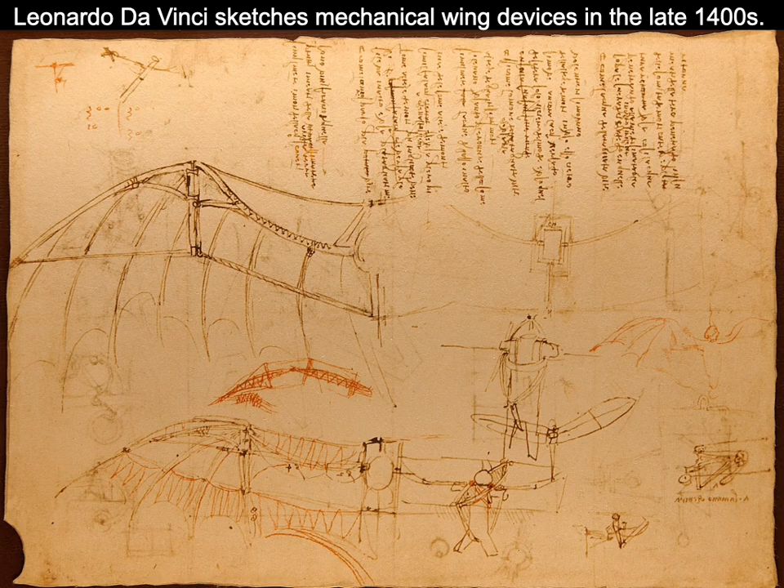In the late 1400s, Leonardo da Vinci became fascinated with flight and sketched a number of mechanical wing devices. Like many others before him and after him, he drew his inspiration from the birds. Unfortunately, his design would never have gotten off the ground. Humans are just too heavy and don't have the muscle power to achieve flight by flapping wings.

The first real breakthrough came from the Montgolfier brothers, but their approach was entirely different. The brothers owned a paper manufacturing company. After noticing that a paper bag would rise up into the air when held over a fire, they decided to test this principle using a much larger bag with a fire suspended below it. A sheep, a duck, and a rooster became the first lucky passengers. Fortunately, they landed safely, and a few months later, Étienne Montgolfier made the first manned balloon flight.

On December 1, 1783, Professor Jacques Charles and the Robert brothers made a successful flight from Paris in a hydrogen-filled balloon. Hydrogen, being the lightest element, rises just like hot air. To descend, the pilots opened a release valve to let some of the gas escape, then tossed out bags of sand to slow the descent if they were coming down too fast. This method of controlling altitude was cumbersome, and there was still no way to control the direction of flight.

Henri Giffard attempted to solve this problem by giving a more streamlined shape to the balloon and mounting a steam engine and propeller in the carriage. This made some rudimentary directional control possible, but only in very light winds.

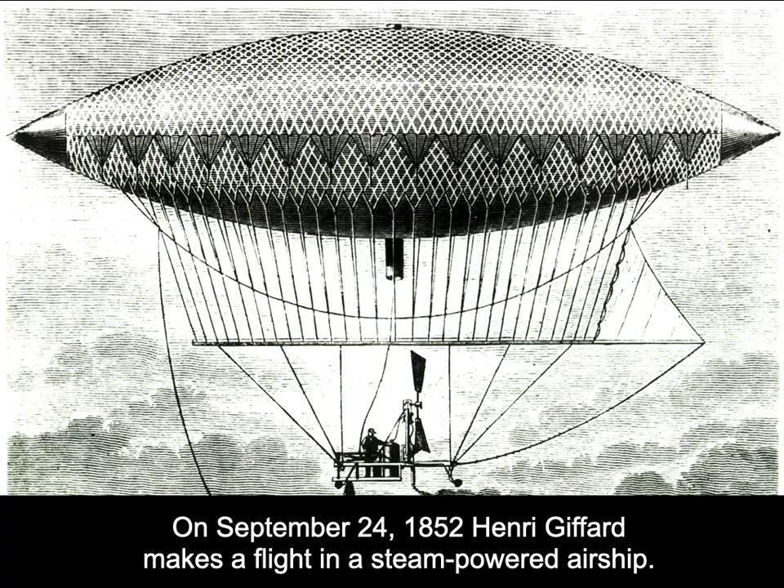Meanwhile, others were trying to solve the problem of heavier-than-air flight. Otto Lilienthal made a number of flights in gliders from a hill on the outskirts of Berlin. He was able to control his direction of flight by shifting his weight forward and aft, and from side to side. Unfortunately, he was killed after hitting a gust of wind and stalling the glider.

The Wright brothers diligently studied the writings of Otto Lilienthal and began building and testing their own gliders. In addition to making extensive observations of birds in flight, they also built a wind tunnel in their bicycle shop to better understand the principles of lift and aerodynamic control.

The last piece of the puzzle was to develop a lightweight engine, which their mechanic, Charlie Taylor, was able to build for them. Everything finally came together on December 17, 1903, and the Wright brothers were able to make the first successful powered flight. The amazing short film in the next slide has actual interviews with people who knew and worked with the Wright brothers, including their mechanic, Charlie Taylor.

What the Wrights had achieved at Kitty Hawk barely evoked passing attention in a nation whose people were absorbed with the problems of a dynamic new age. There were other less celestial wonders closer at hand: the automobile, the telephone, the motion picture.

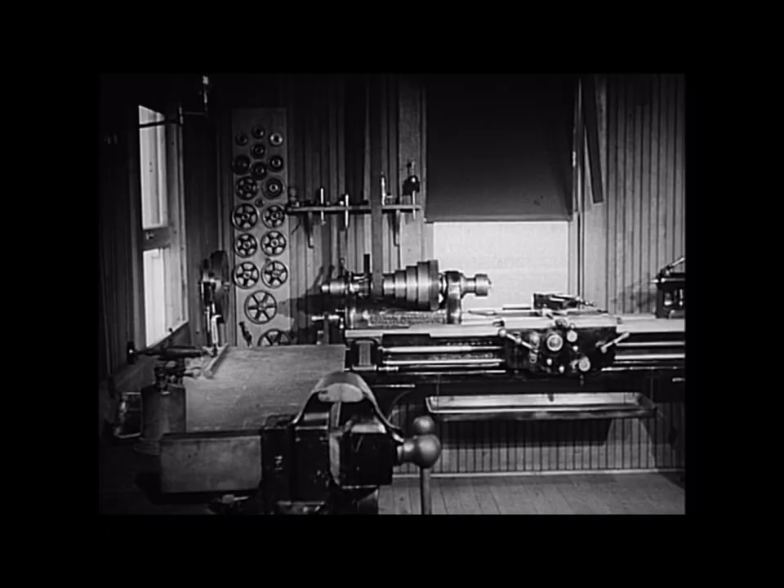The telegram from Kitty Hawk had a special significance for the mechanic who worked in the Wrights' bicycle shop, Charlie Taylor. 'Of course, I was greatly pleased to know it had been accomplished, but at that time it didn't seem to be anything wonderful at that. I started on repairing bicycles back in the 80s.'

And then I later went to Dayton and built bicycles for the Stoddard Manufacturing Company. They were just starting up in the bicycle business. Then I got acquainted with the Wrights, and I built bicycles for them. I did all the repair work while they went down to Kitty Hawk to try out their gliders.

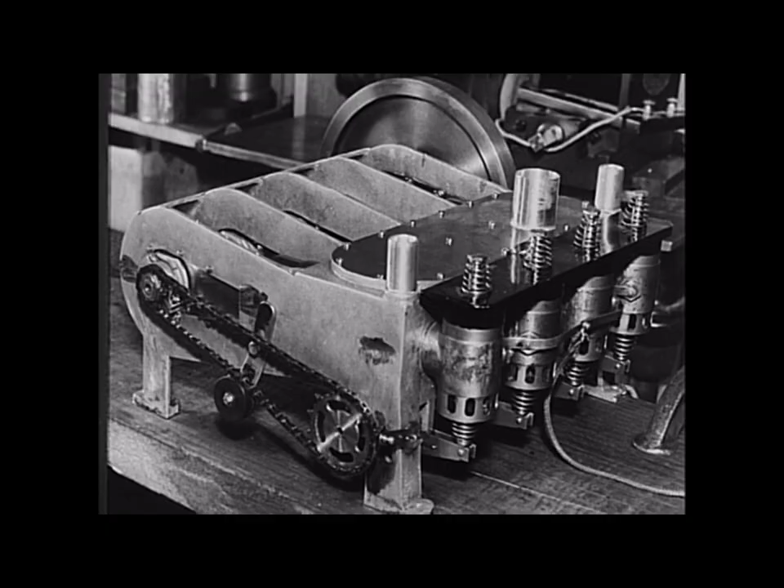Well, all they needed was power to keep on flying. So when we designed the motor, I made all the different parts in the motor. I even made the crankshaft, out of a solid block of steel, about 32 inches long, 6 inches wide, and 1 5/8 thick. I cut it right out of the solid block by drilling holes and knocking out large pieces, then turning it up in the lathe. The motor itself, from the time I started till I had it ready for test, was 6 weeks.

50 years ago, I can remember it as though it was yesterday almost.

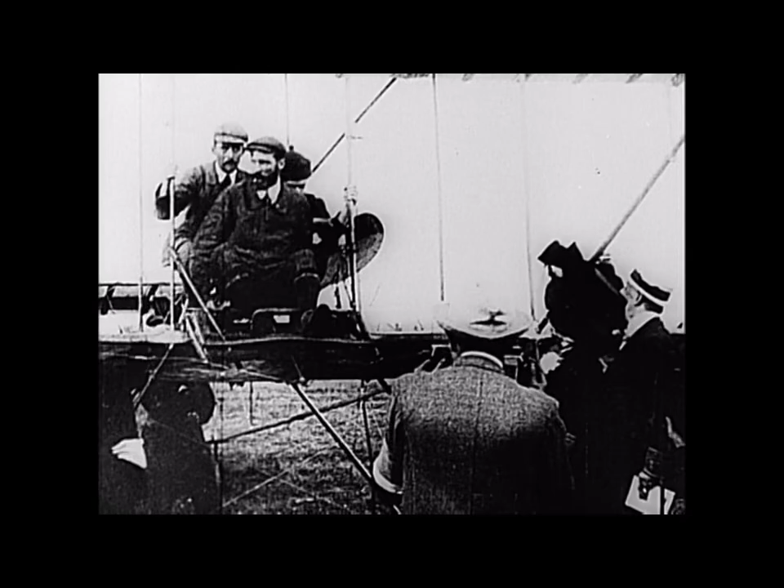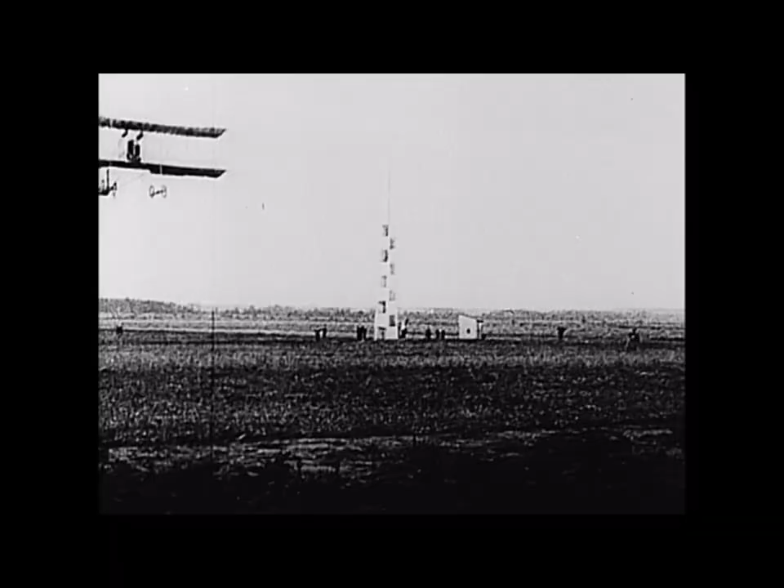The Wrights had offered to demonstrate their airplane to the United States Army shortly after their first successful flights. The Army declined, preferring to develop its small fleet of balloons as an air arm. Oddly, it was a young balloonist lieutenant of the Army, Frank P. Lahm, who finally was instrumental in obtaining a chance for the Wrights and their airplane. After 4 long years of failing to recognize the Wrights, finally, in December of 1907, the Board of Ordnance and Fortification granted an interview to Wilbur.

At once, he inspired their confidence. This led to a contract in February of 1908 between the Wright brothers and the Signal Corps, in which they agreed to furnish an airplane that would fly 40 miles an hour, carry 2 persons, remain in the air for 1 hour, and, strange to relate, was to have some kind of device by which, in case the motor stopped, it could be landed without crashing.

In the summer of 1908, Orville Wright brought to Fort Myer, Virginia, the airplane that was to fulfill the specifications of the contract. Day after day, we watched him fly around and around the field in his tuning-up flights. And finally, on the 9th of September, he broke the world record by staying in the air for over 1 hour.

On landing, he came to me and said, 'Would you like to go up?' You can guess my answer. I made my first flight in an airplane that day with Orville Wright, 6 minutes and 40 seconds. Lieutenant Lahm became the first military officer ever to fly in an airplane.

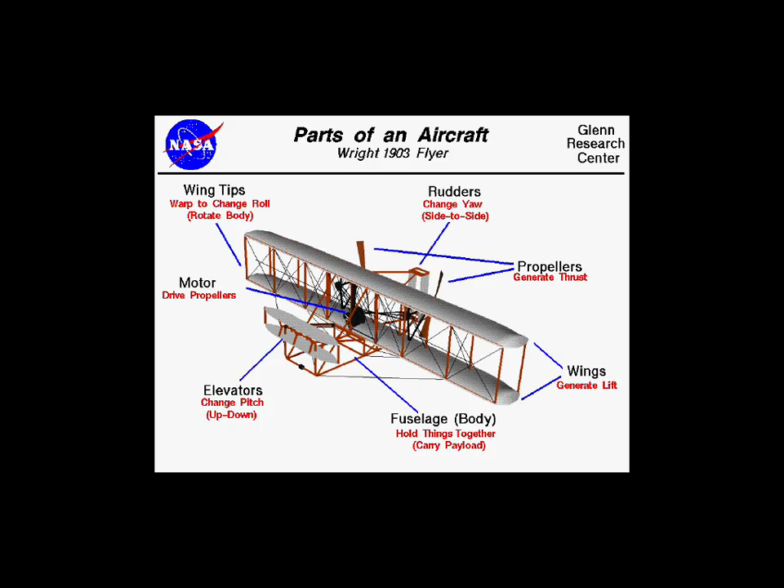This form of aerodynamic control, referred to as 3-axis control, was much more precise than the weight shift control utilized by Otto Lilienthal in his gliders. The aircraft could be rotated along 3 axes. The elevator, located out in front, could be deflected up or down, causing the pitch to move up or down along the lateral axis. Deflecting the rudder left or right caused the front of the aircraft to yaw left or right around the vertical axis. The right and left wingtips could be deflected in opposite directions, causing the aircraft to roll left or right along the longitudinal axis.

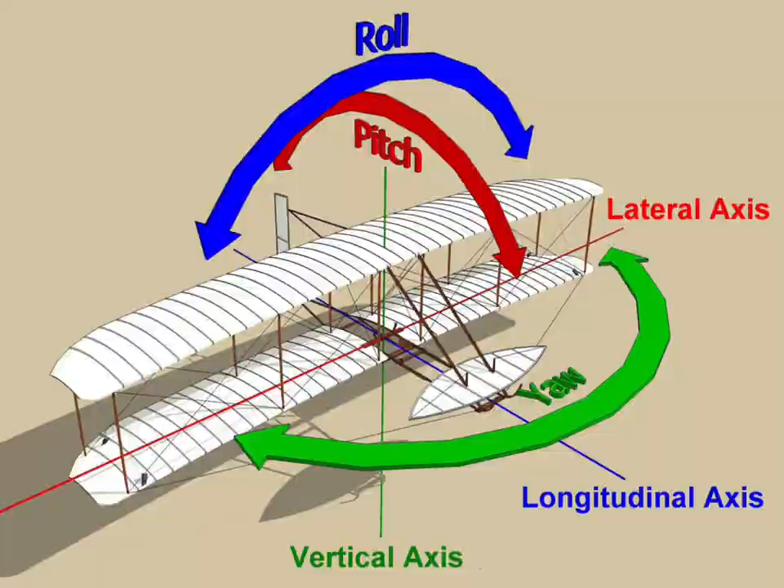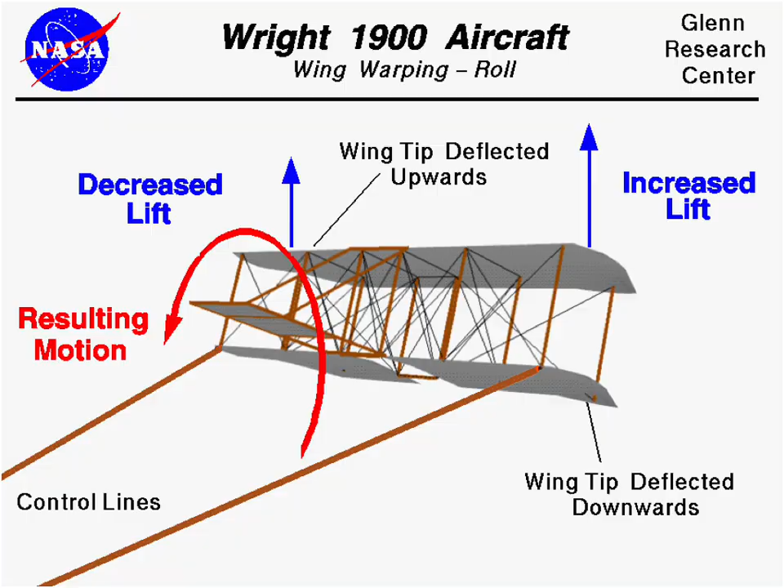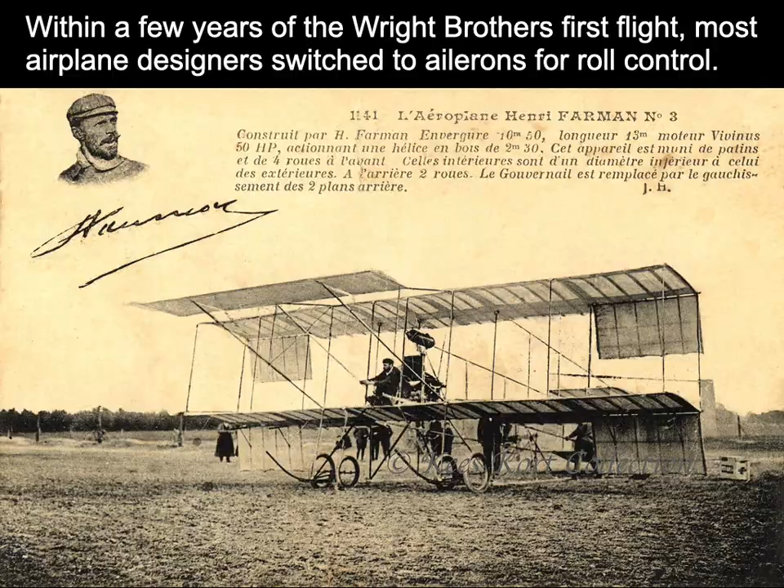The Wright brothers' system of wing warping, which they had patented, was soon abandoned by subsequent inventors who favored ailerons. These consisted of panels fitted to the wing's trailing edges that could be moved in opposite directions. Ailerons worked just like wing warping, spoiling lift on one side while increasing camber and generating more lift on the other side. All modern aircraft use ailerons for roll control.

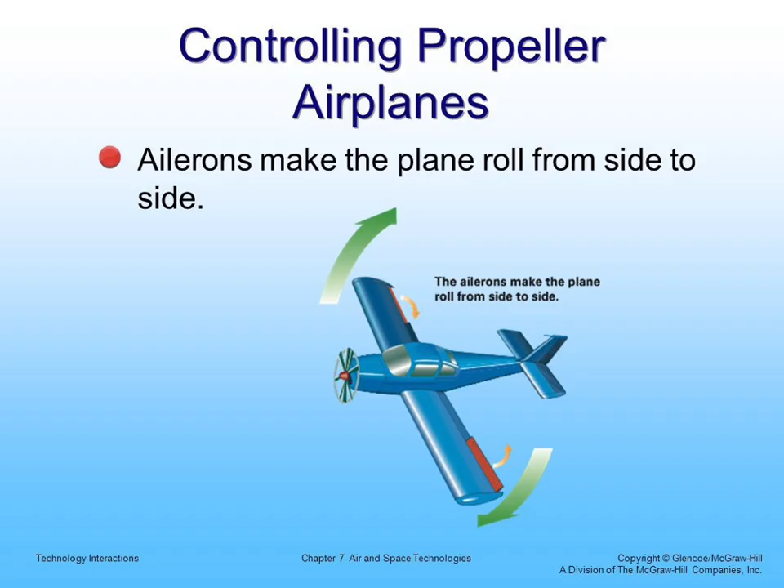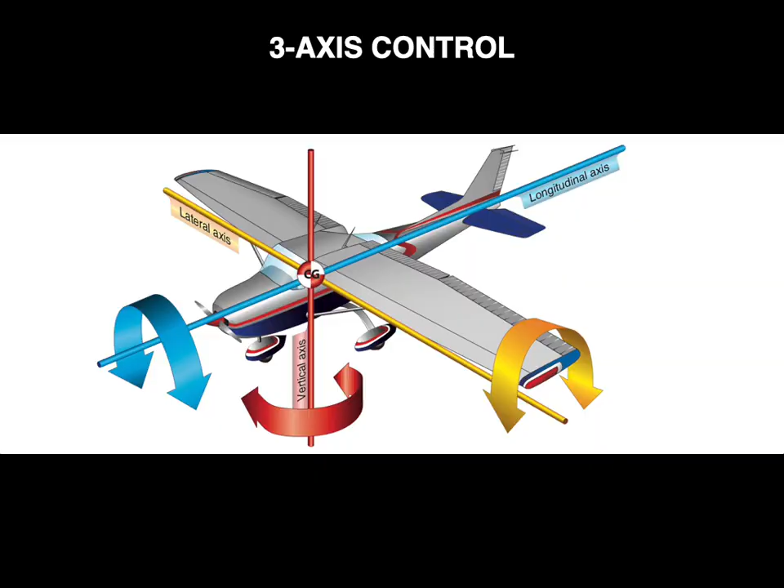The ailerons, elevator and rudder are connected by cables and pulleys or pushrods to a stick or yoke manipulated by the pilot, allowing for full 3-axis control. These control surfaces are called the primary flight controls.

In addition, most training aircraft also have secondary flight controls. A manual trim wheel or electric trim button, connected to a small deflecting surface on the elevator, can be adjusted from inside the cockpit to relieve the pilot from putting constant pressure on the stick or yoke. Rudder trim can be achieved by bending a small metal tab on the trailing edge of the rudder, but this should only be done by a licensed mechanic.

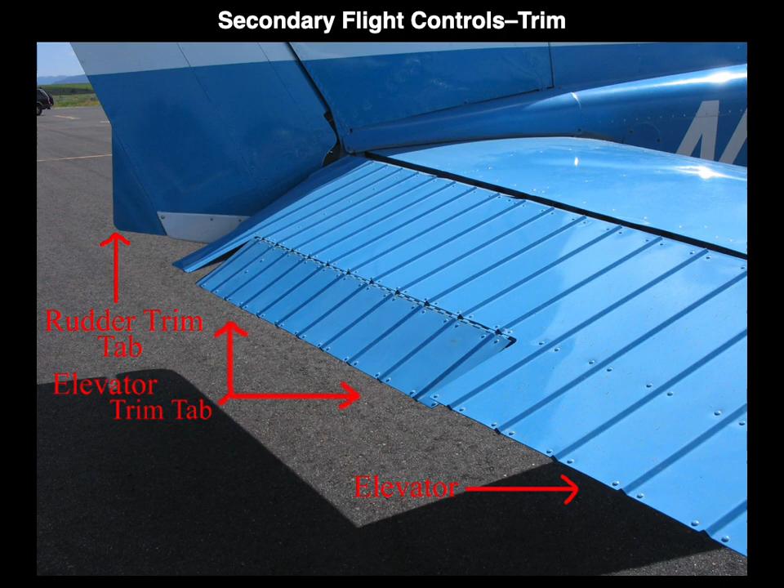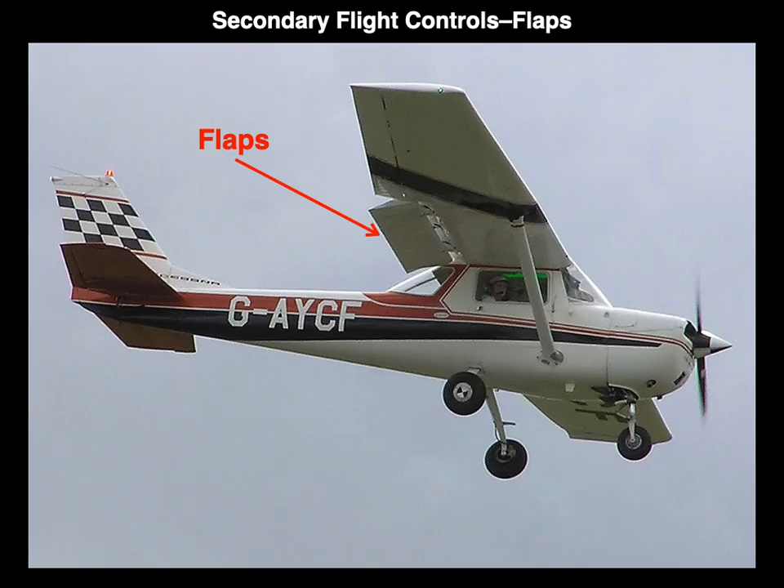Flaps are another type of secondary flight control. They consist of a panel on the trailing edge of the wing that can be deflected downwards, simultaneously increasing lift and drag. Deploying the flaps allows the aircraft to make a steeper approach to landing, without increasing airspeed.

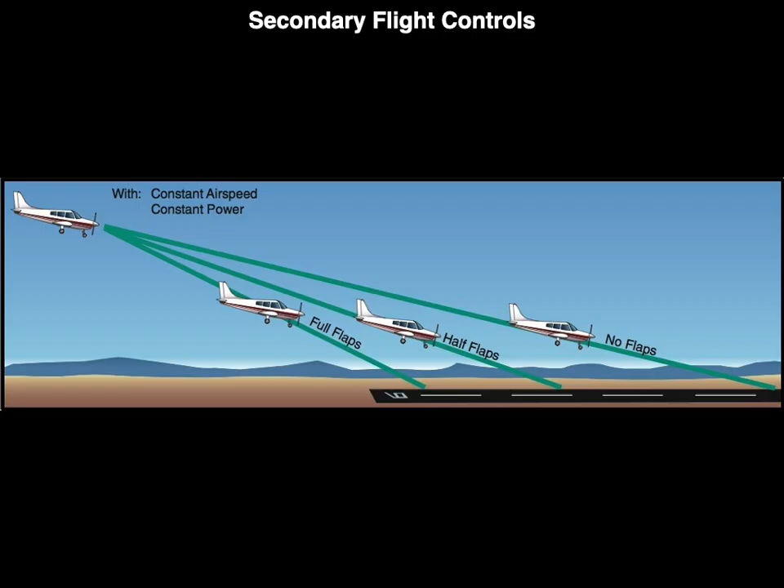Large airliners have many other secondary flight controls, such as spoilers, that can be deflected upwards into the airflow over the wing to reduce lift and aid in the descent. Spoilers are also used on gliders, but not on powered training aircraft.

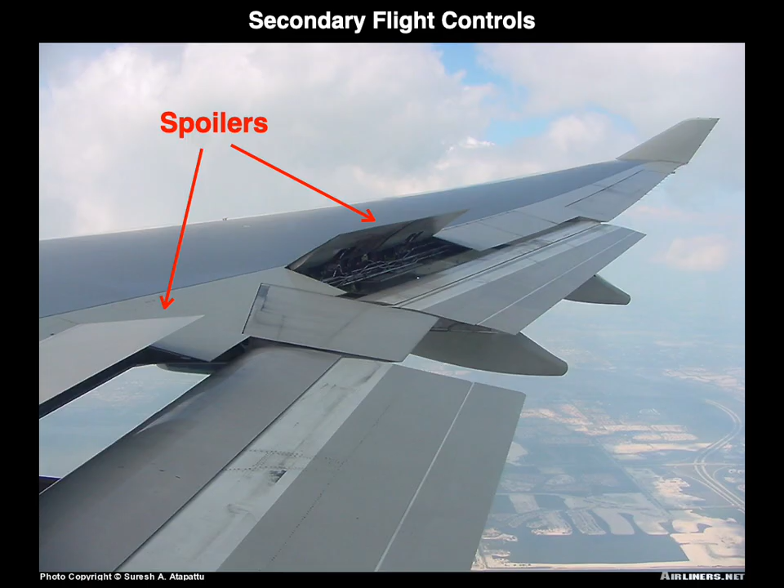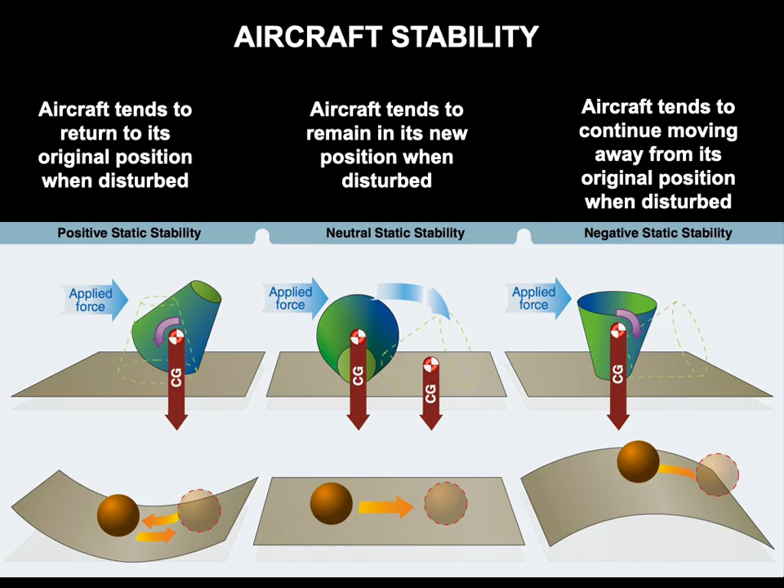Stability is critical for flight control, especially on aircraft that will be used for training. Stability can be positive, neutral, or negative. There are two kinds of stability that are important in aircraft design: static and dynamic.

Aircraft designed with positive static stability will return to the previous flight attitude after a pitch-down disturbance. Those with neutral static stability will remain in the new flight attitude, and those with negative static stability will continue further and further away from the previous flight attitude.

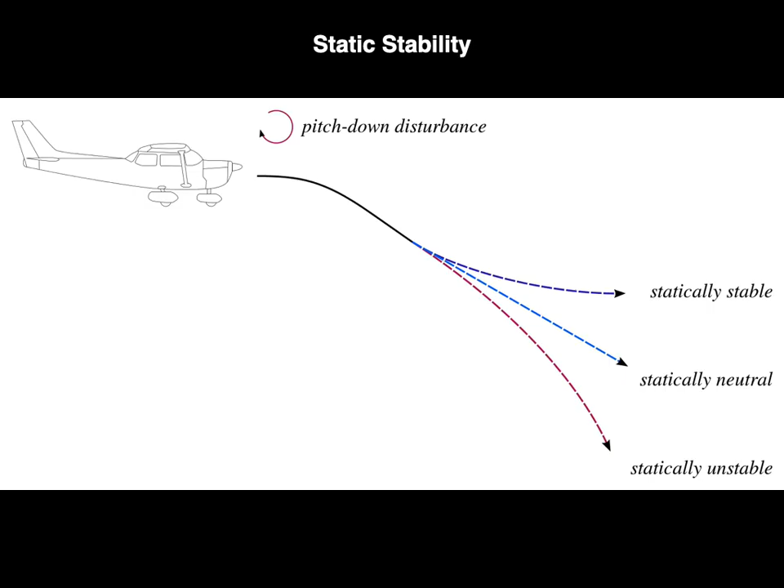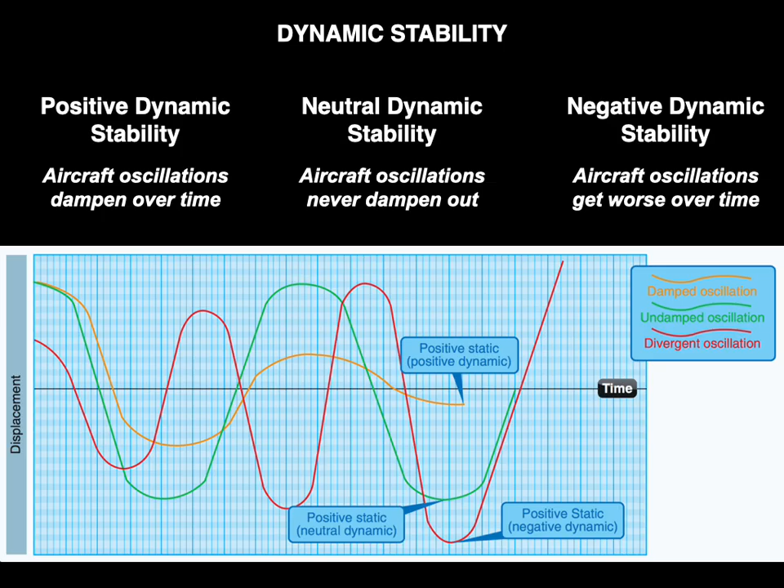Dynamic stability refers to an aircraft's tendency to oscillate. Oscillations will dampen out over time in aircraft designed with positive dynamic stability. Oscillations will continue but not worsen in aircraft with neutral dynamic stability, and oscillations will get progressively worse in aircraft with negative dynamic stability. Thus, aircraft with negative static and dynamic stability will be very difficult to control.

However, in some types of aircraft, such as high-performance fighter jets, instability may actually be a desirable quality because it makes them more maneuverable. Grumman's X-29 experimental fighter was so unstable that it could only be flown with the assistance of a computer that made continuous movements of the flight control surfaces that were never sensed by the pilot.

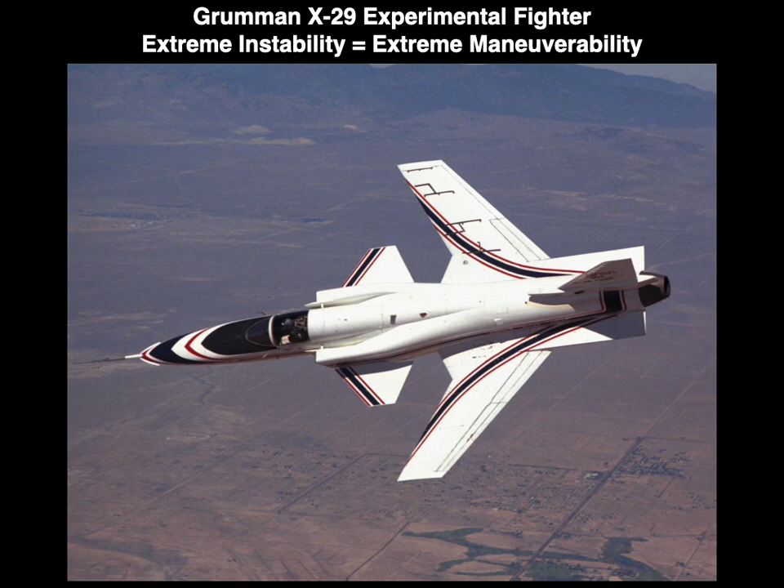There are 4 forces acting on an airplane in flight: lift, weight, thrust, and drag. In steady-state flight, all of these forces are equal, regardless of whether the aircraft is in level flight, a climb, or a descent. For example, as an aircraft transitions to a climb, lift will temporarily be greater than weight until the aircraft is established in the climb. Then lift and weight will become equal again.

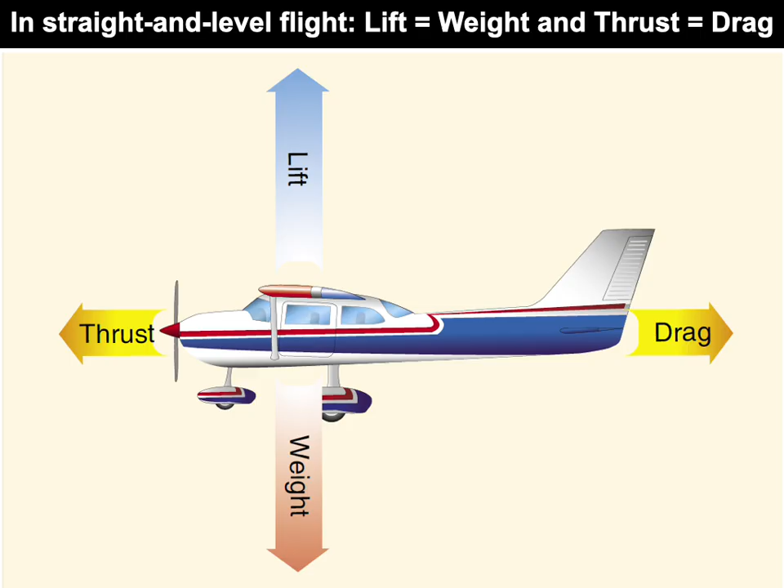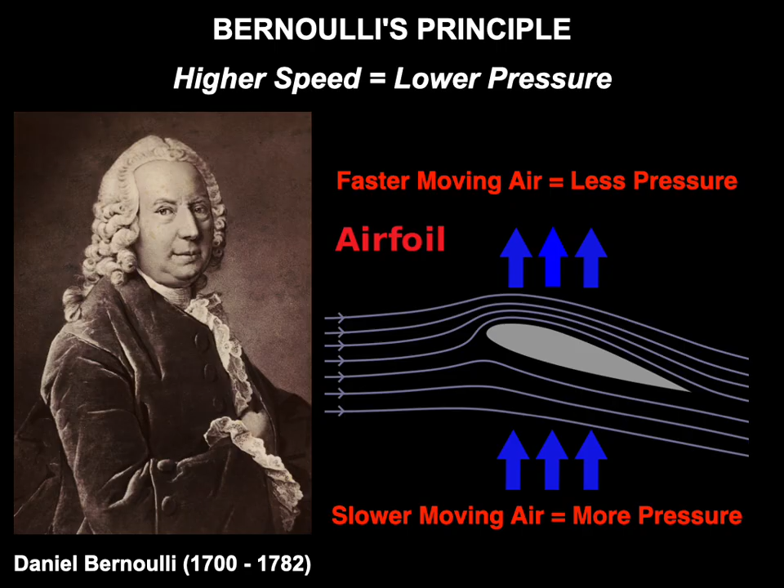Bernoulli's principle can help us understand the lifting force acting on a wing in flight. Bernoulli was an 18th-century Swiss scientist who discovered that any fluid, including air, exerts less pressure the faster it is moving. Because of a wing's curvature, air moves faster over the upper surface than over the lower surface. The slower-moving air under the wing has a higher pressure, pushing the wing upward toward the lower-pressure air above it.

This principle can be demonstrated and accurately measured using a Venturi device, a simple tube that narrows in the middle. As air flows through the venturi, its pressure lowers as it enters the constriction in the middle of the tube, then rises to the previous level as it reaches the larger opening at the other end. As we see in the following video, the same principle is at work even if the upper portion of the venturi is removed, effectively creating a curved surface similar to a wing.

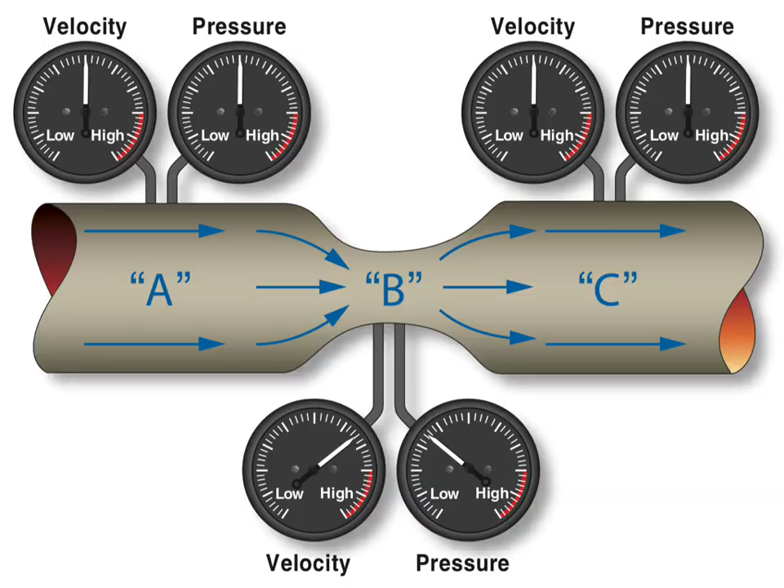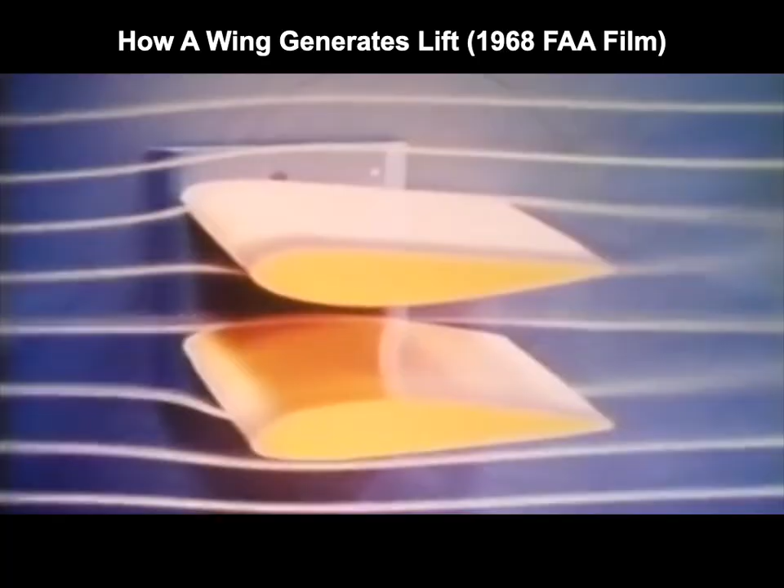If we can see the air, then perhaps it will help us answer our beginning question: how do airplanes fly? We'll start with a double-winged model in the airflow. The action of the air between the wings will demonstrate a basic principle of aerodynamics.

Now, by animation, let's study the airflow in greater detail. First, note that its pattern suggests it is passing through a tube-shaped device. Next, notice that the entrance and exit of the device are the same size. We can measure the openings and find that the ends are each 10 square inches.

The middle part is squeezed, creating a throat of 5 square inches. Now, if we direct smoke lines through the device, its pattern will show that something happens to the air where it goes through the narrowed part.

What we find is that when the airspeed is 100 miles an hour at the entrance of the device, it is also 100 miles an hour at the exit. Yet at the same time, the speed at the narrow part is considerably higher. It can easily be understood, therefore, that the air increases in speed as it passes through the smaller opening.

But the interesting thing is that in order for the air to go at the faster speed through the narrow part, something has to balance this change in velocity, this speed difference. What changes is the air pressure in the narrow part. This pressure is significantly lower than the pressure at either end.

But what does this have to do with flying? If we cut the model in half, we would have a profile similar to an aircraft wing section, called an airfoil.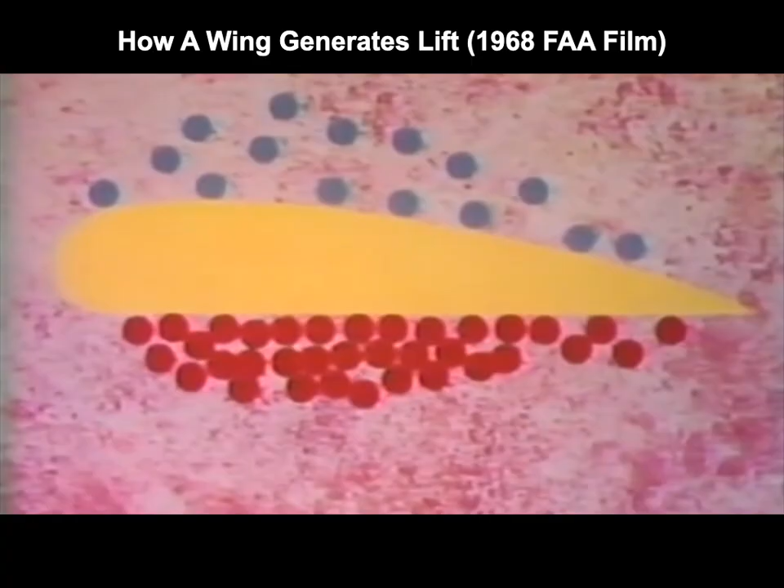Another force that helps create lift on a wing comes from Isaac Newton's third law of motion: for every action there is an equal and opposite reaction. As air flows over a wing, some is deflected downward, creating an equal and opposite reaction that pushes the wing upward. You've probably experienced this principle when holding your hand out the window of a moving car.

By angling your palm down, the wind hitting it is also deflected downwards, pushing your hand up. The same principle works in any fluid, including water. As seen in the following video, jumping up and down on the aquaskipper pushes the blade or water foil forward and water downward, propelling the rider up so he doesn't sink.

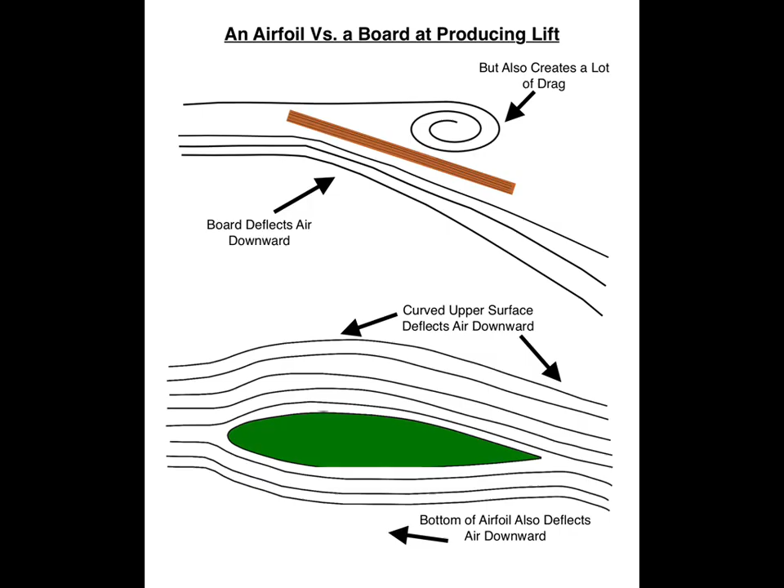The curved surface of a wing promotes smooth airflow and takes full advantage of Bernoulli's principle and Newton's third law of motion. A wing can be symmetrical or cambered. Symmetrical wings are useful when the aircraft will also fly upside down, such as an aerobatic plane or fighter jet. Training aircraft have cambered wings.

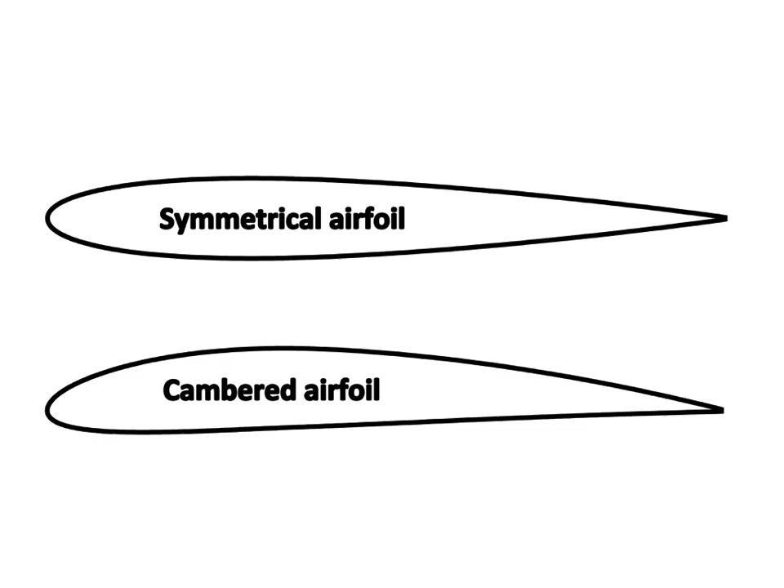Even the curved surface of an aircraft's fuselage provides some lift. The X-24B experimental aircraft didn't even have wings. Some of the lessons learned from the flight testing seen in the following video were incorporated into the design of the space shuttle.

When airflow over the surface of a wing is disrupted too severely, a stall can result. Lift will be lost and the wing will suddenly drop along with the aircraft it is attached to. As the aircraft moves into a dive, airflow over the surface of the wing is restored, along with the lift.

It is very important to avoid inadvertently stalling the aircraft, especially near the ground, when there may not be enough altitude to recover. If an aircraft does stall, the solution is to push the nose down and add power to restore airflow to the wing as soon as possible.

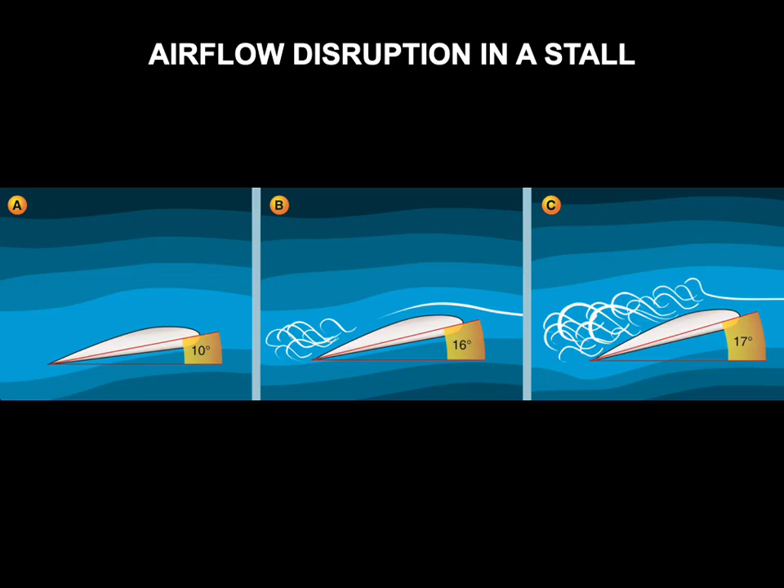A stall occurs when the wing exceeds the critical angle of attack, which is the angle between the chord line and the relative wind. Relative wind is the air flowing over the leading edge of the wing, even though the actual wind may be coming from a different direction.

For example, imagine you are in a convertible car parked at a stoplight. The wind is coming from your left, blowing against the left side of your face. When the light turns green and you begin accelerating, the wind will be blowing directly into the front of your face. This is the relative wind.

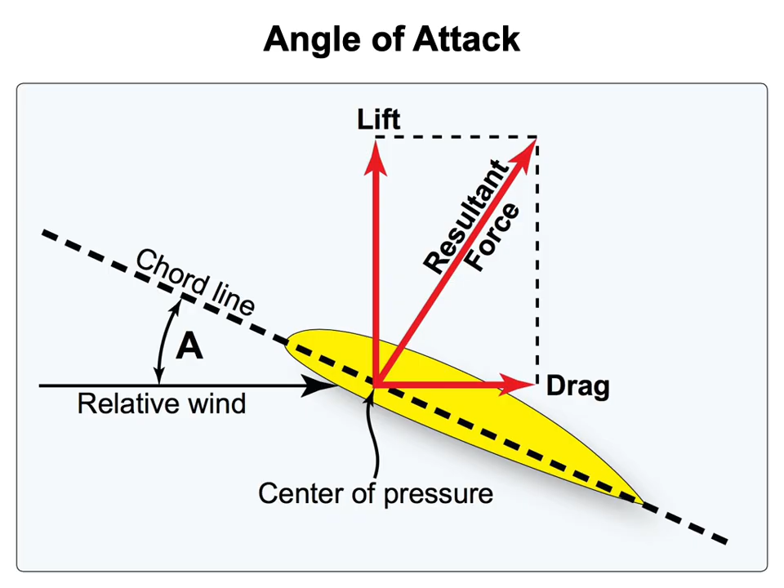Wing loading is the total weight of the aircraft with fuel, passengers, and baggage, divided by the total wing area. Naturally, a larger wing can lift more weight. Too much weight on the wings can prevent an aircraft from leaving the ground, or worse, cause it to structurally fail in flight. Even though you might be able to get airborne, when maneuvering in a turn or hitting a gust of wind, the aircraft will experience an increase in wing loading.

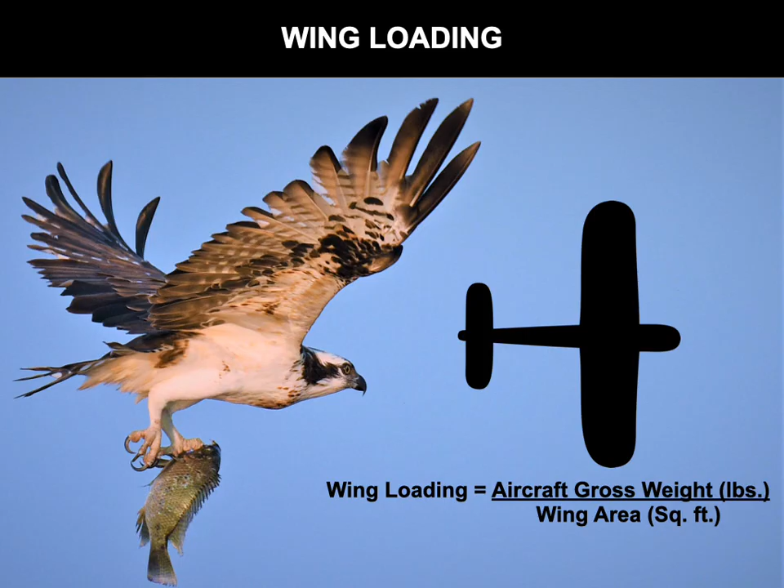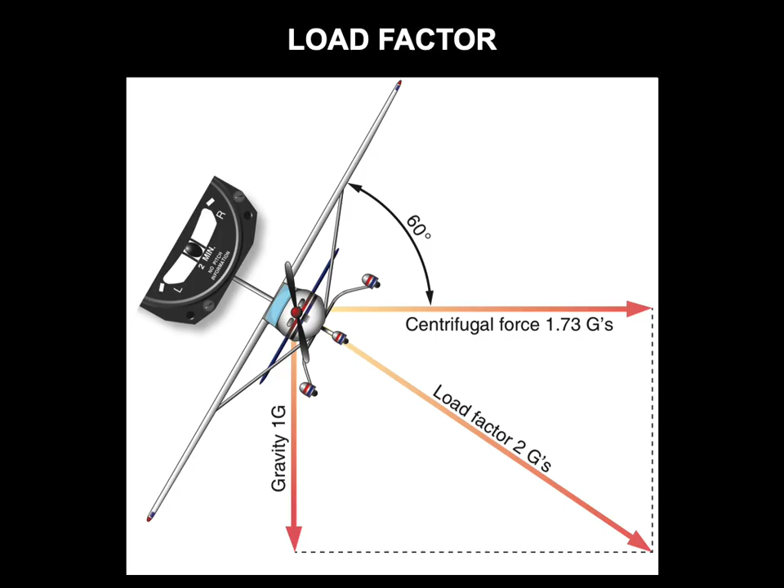The weight you feel in level flight is 1 g, the same as when sitting in a chair on the ground. If you make a turn in an aircraft or in a roller coaster on the ground, you will feel pressure as you are pulled against the seat by centrifugal force. Depending on your speed or angle of bank, this force can increase considerably. For example, an aircraft in a 60-degree bank will experience a load factor of 2 Gs, or double the normal force of gravity.

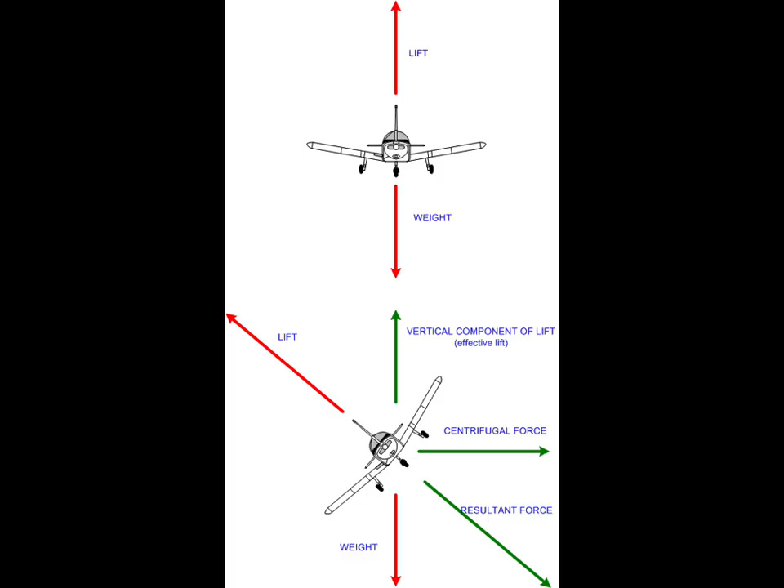When making a turn, a pilot will need to increase the wing's angle of attack to maintain altitude. That's because a portion of the vertical component of lift has been shifted horizontally to make the airplane turn.

The increased load factor placed on a wing in a turn also causes it to stall at a higher speed. It's important for pilots to remember that the stalling speed, noted in the airplane flight manual and by the white and green arcs on the airspeed indicator, will increase in a banked turn. It is critical for pilots to keep this in mind when making turns in an approach to landing, since staying above the published stalling speed may still result in a stall, and there may not be enough altitude to recover.

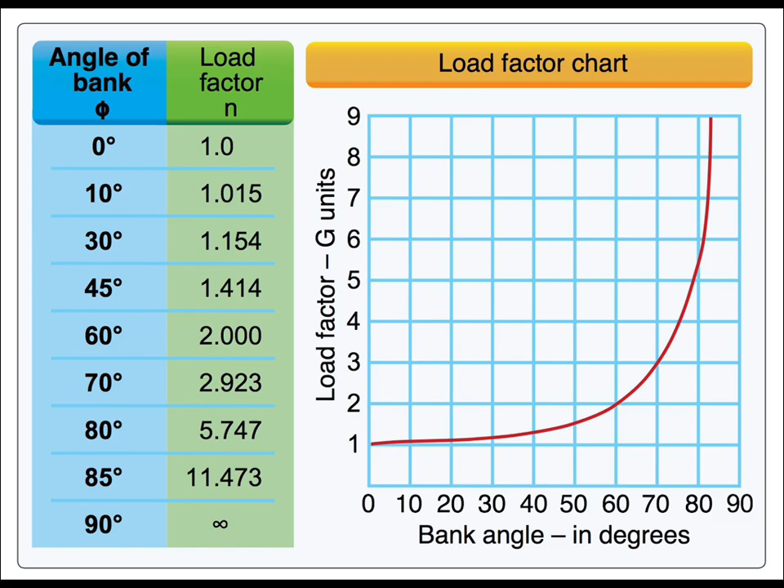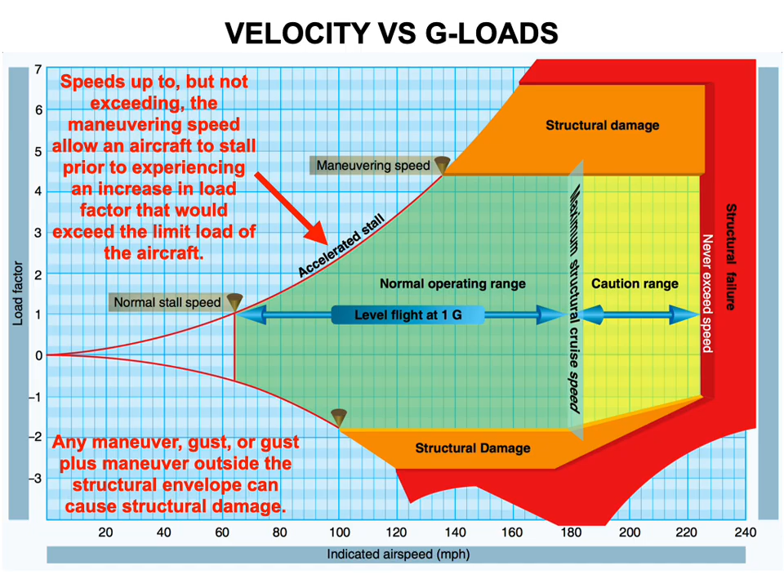However, in the yellow caution range, a sudden increase in wing loading could cause damage to the aircraft. This is why pilots should only fly at speeds within the yellow arc when the air is smooth. The red line on the airspeed indicator, the never exceed speed, corresponds to the red portion of the graph, where structural damage is likely to occur even in the absence of a gust or abrupt maneuver.

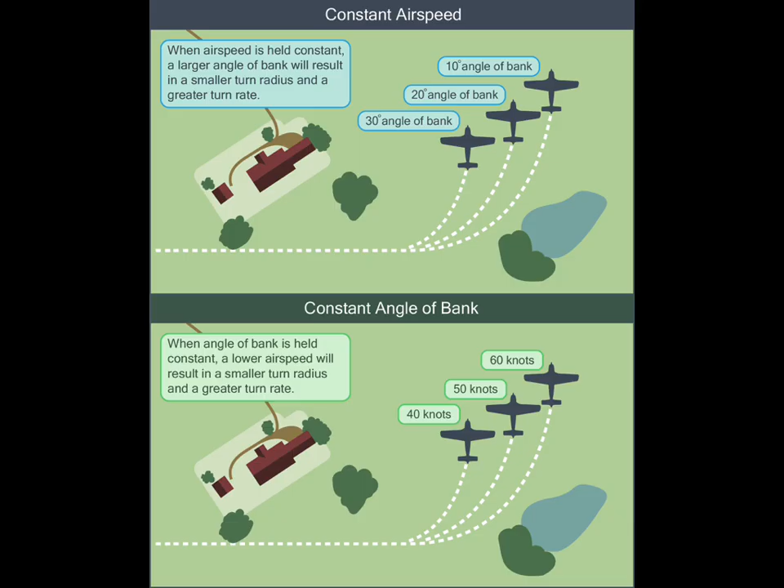Airspeed and angle of bank both affect the rate and radius of a turn. When airspeed is held constant, a larger angle of bank will result in a smaller turn radius and a greater turn rate. When angle of bank is held constant, a lower airspeed will result in a smaller turn radius and a greater turn rate. So, if a pilot needed to turn around in a valley or canyon, and was concerned about making the turn before hitting the other side, a lower airspeed and steeper angle of bank would improve the chances of completing the turn.

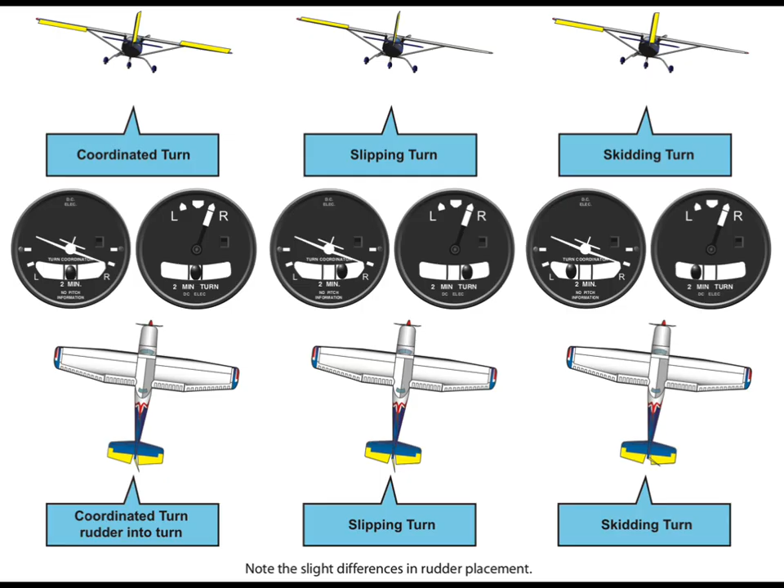A proper turn in an aircraft is made by coordinating the movements of the ailerons and the rudder. Although a turn could still be made with just one of these control surfaces, it would not be smooth and might even contribute to a stall. Thus, a right turn should be made by moving the yoke or stick to the right while simultaneously pushing the right rudder just enough to keep the black ball between the two black lines in the turn coordinator instrument. Too little right rudder will result in a slipping turn, and too much right rudder will result in a skidding turn.

Sometimes, a pilot may want to deliberately use the yoke and rudder in an uncoordinated way in order to lose altitude quickly, such as in an approach to landing when the aircraft is too high. This maneuver, called a forward slip, is made by pushing the rudder far to the right while simultaneously turning the yoke in the other direction, balancing the two controls to keep the aircraft moving straight ahead even though the nose is turned to the right. The maneuver also works if these controls are reversed. Learning to use a forward slip to lose altitude will take some practice and should initially be done under the supervision of an instructor, since it is easy to stall the aircraft in this configuration if proper airspeed is not maintained.

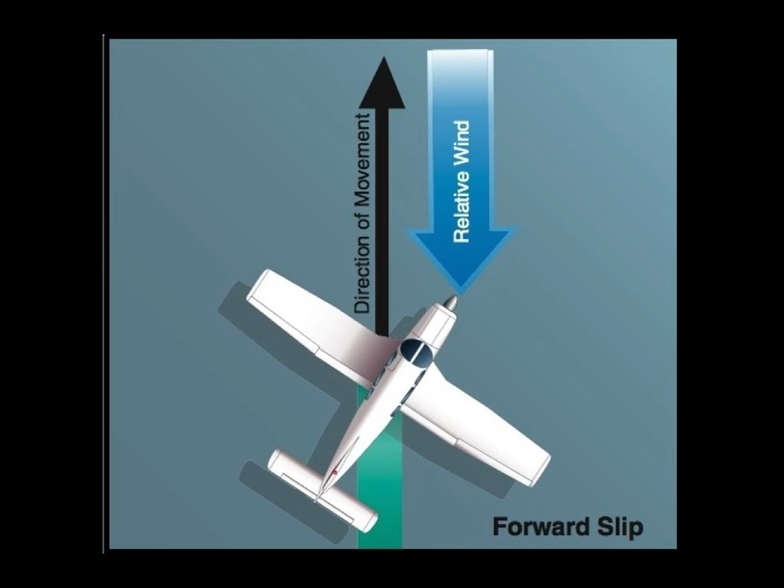Another reason turns are made by coordinating both the ailerons and the rudder is to compensate for adverse yaw. This phenomenon, first noticed by the Wright brothers, is a result of differing amounts of lift on each side of the wing when a turn is made. The downward movement of the aileron on one side of the wing increases the camber, thereby increasing lift. Meanwhile, the upward movement of the other aileron spoils the lift, causing the wing to drop. However, the increased lift on the other wing also increases induced drag, which pulls the nose of the aircraft in that direction even though it is opposite the direction of the intended turn. Adverse yaw is corrected by pushing the rudder pedal in the same direction as the yoke and coordinating the turn.

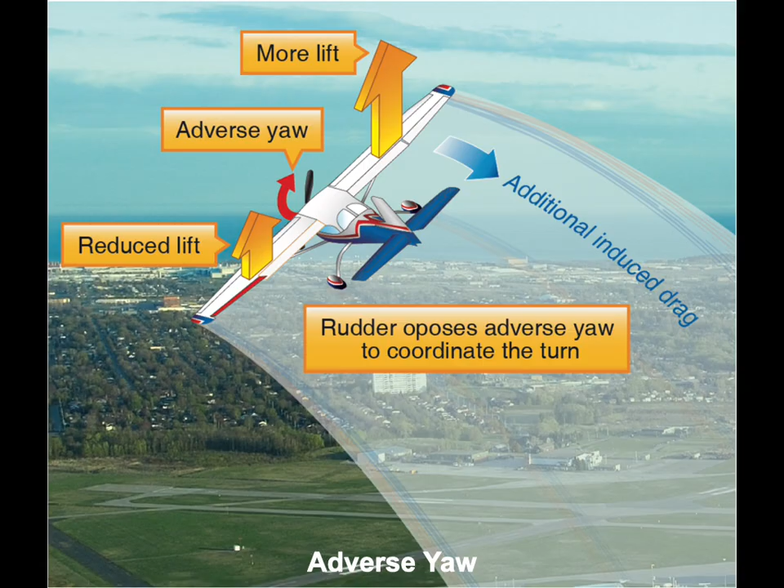Torque is another aerodynamic force that can be attributed to Newton's third law of motion: for every action there is an equal and opposite reaction.

The propeller, viewed from the pilot's seat, spins from left to right. This action causes a tendency for the entire aircraft to spin in the other direction, just like a hand drill when it is not held tightly.

Torque is most noticeable at high power settings during takeoff and is corrected by applying right rudder.

Training aircraft do not have enough power to make torque a big factor, but high-powered fighter planes such as the P-51 Mustang could sometimes spin around upside down on takeoff. A modern modification of this aircraft for air races consisted of adding a counter-rotating propeller, which would counteract the effects of torque.

The spinning propeller also creates another aerodynamic force called P-factor. The P just stands for propeller.

At high power settings and high angles of attack, as in takeoff and climb, the descending blade, on the right, when viewed from the pilot's seat, has a higher angle of attack than the ascending blade, on the left. The right side of the propeller therefore creates more thrust.

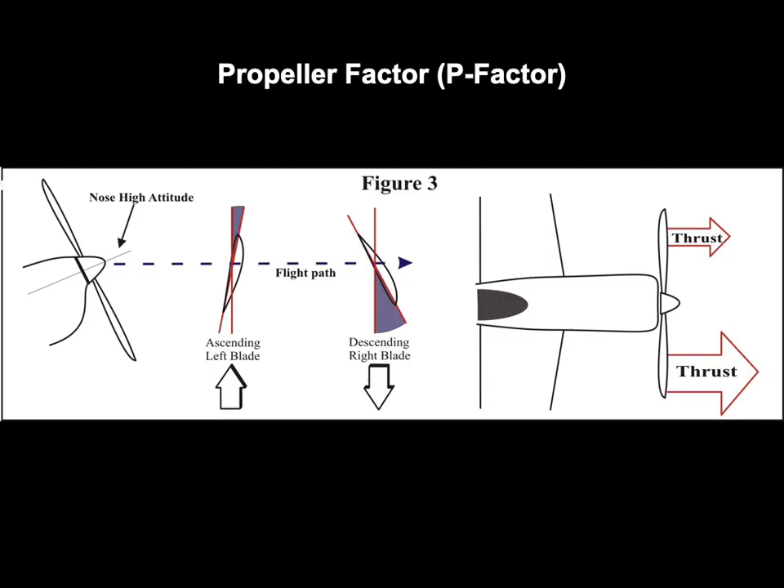The aircraft will have a tendency to yaw to the left. This tendency can be corrected by applying continual pressure to the right rudder during the climb.

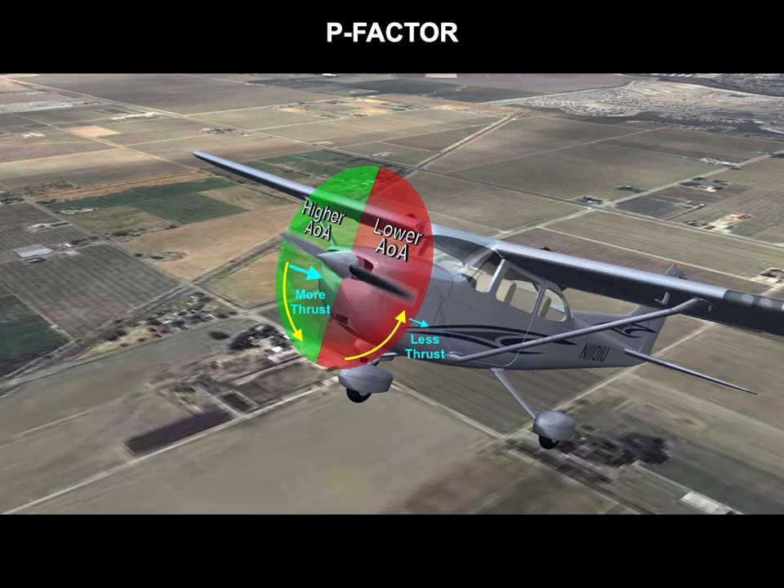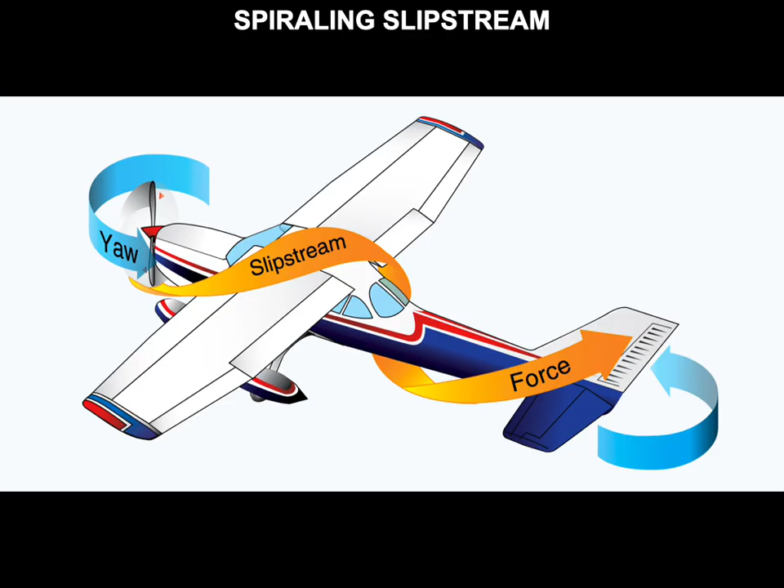The spiraling slipstream created by the propeller wash also tends to move around the fuselage of the aircraft and push against the vertical stabilizer, creating an additional force that causes the aircraft to yaw toward the left. Once again, this tendency can be corrected by applying right rudder pressure.

Drag is another aerodynamic force that has powerful effects on an aircraft. There are two types of drag: induced drag and parasite drag. Induced drag is a byproduct of lift itself and its effects are most noticeable at lower airspeeds. As airspeed increases, induced drag decreases, but parasite drag increases.

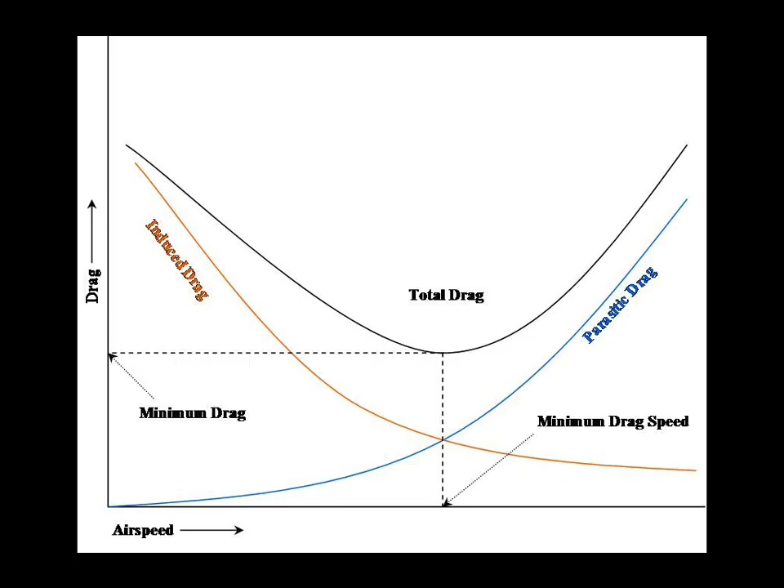Induced drag occurs when the higher and lower pressure air meet at the wingtip, remember Bernoulli's principle, creating a vortex. This vortex in turn causes drag. However, near the ground, the spiral airflow of the vortex is interrupted by the surface, diminishing the drag on the aircraft. This phenomenon is called ground effect.

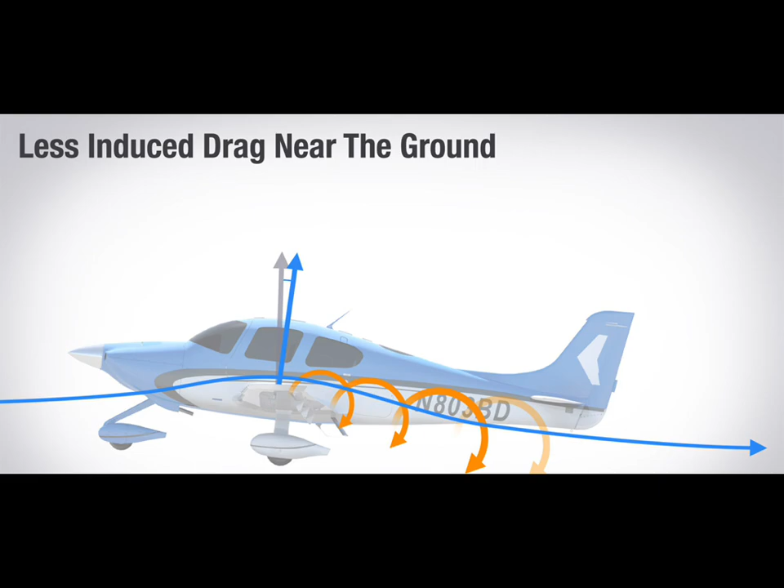Because of ground effect, less thrust is required to overcome a reduced amount of drag. The aircraft may become airborne at a lower indicated airspeed than is necessary to stay aloft.

However, ground effect becomes negligible once the aircraft attains a height of one wingspan from the surface. At that point, it must have enough airspeed to stay aloft or it will start to sink down toward the surface again.

Pilots should compensate for ground effect on takeoff by pitching the nose of the aircraft slightly down after liftoff to accelerate to the best angle or best rate of climb speed.

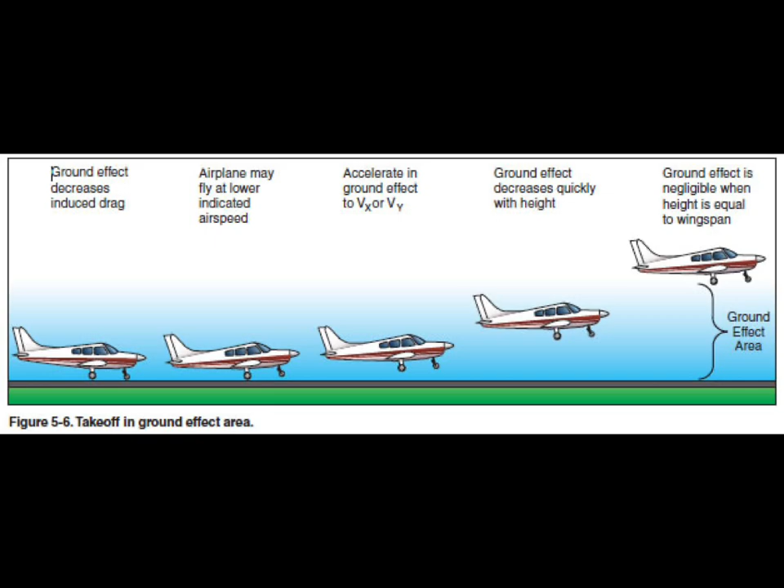On landing, ground effect can cause the aircraft to float along the runway before touching down, especially if the approach is too fast. Pilots should compensate for ground effect on landing by maintaining a stabilized approach at the correct airspeed.

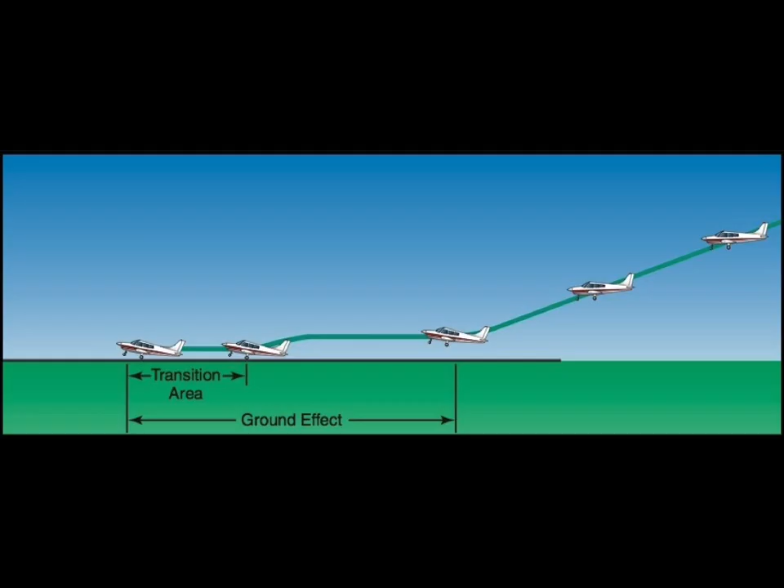The wingtip vortexes generated by induced drag are a hazard to any aircraft taking off or landing behind another aircraft that has just taken off or landed, especially larger ones.

When landing behind another aircraft, make sure you touch down beyond its touchdown point. Wingtip vortexes are no longer generated once the aircraft stops flying.

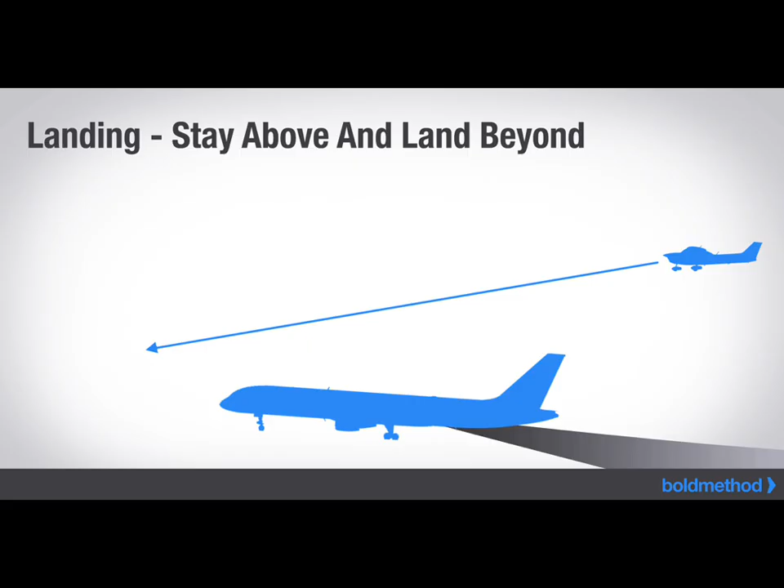When taking off behind another aircraft, rotate prior to its rotation point. Wingtip vortexes aren't generated until the other aircraft starts flying.

Also, maneuver upwind of the other aircraft to avoid the pathway of the vortexes blown by the wind.

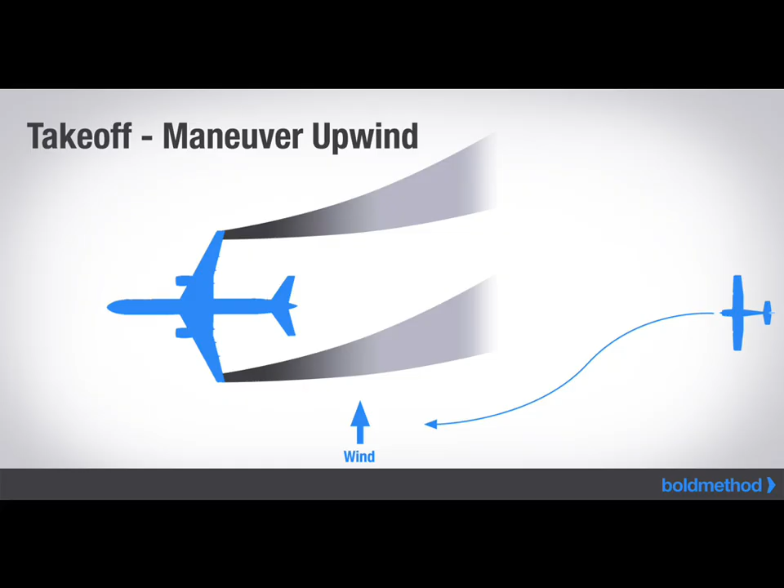Aspect ratio is the ratio of a wing's span to its mean chord, the distance between the leading and trailing edges. A long, narrow wing has a high aspect ratio and a short, wide wing has a low aspect ratio.

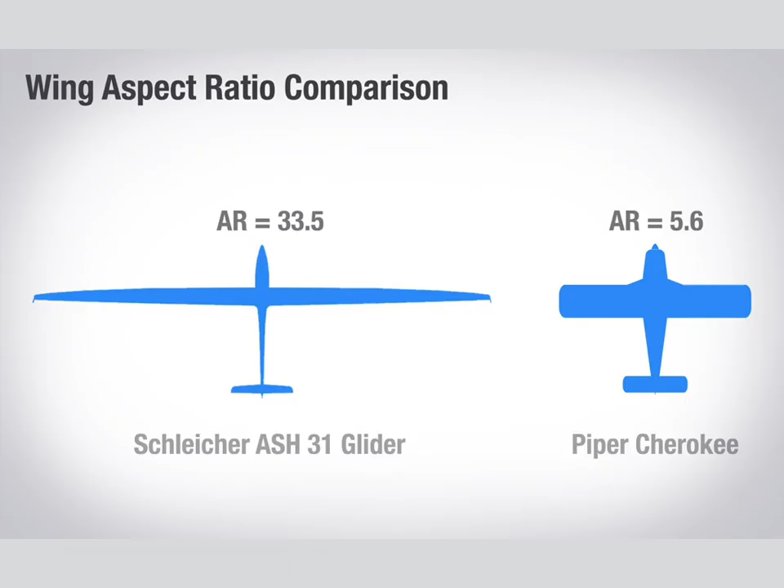High aspect ratio wings produce less induced drag, so they are very efficient and produce a lot of lift. However, they are slow and less maneuverable. Lower aspect ratio wings can generate lift by moving faster through the air.

In the two videos that follow, notice the different types of wings that have been utilized in these two modern manifestations of the ancient dream of flight. Afterwards, try to answer the sample FAA test questions on the remaining slides.